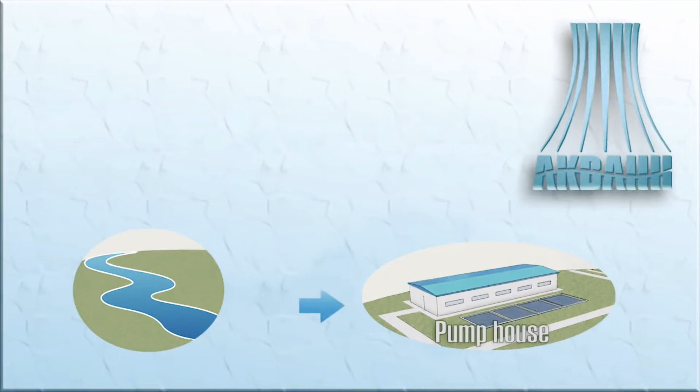In this video we describe the working principle of fan cooling towers. The cooling tower is a device for cooling large quantities of water, which circulates in a water recycling system. Circulating water system is a system in which water is used as the refrigerant for cooling the heat exchange equipment.

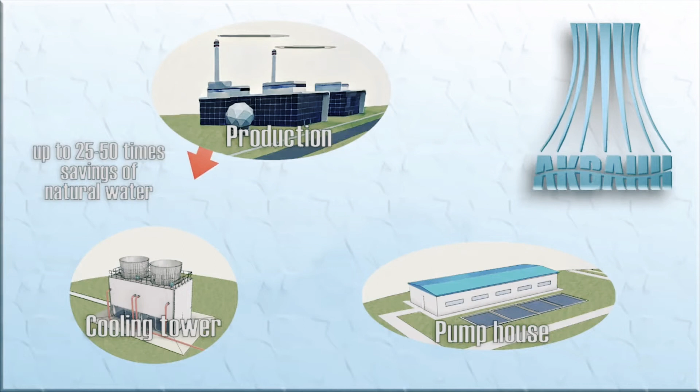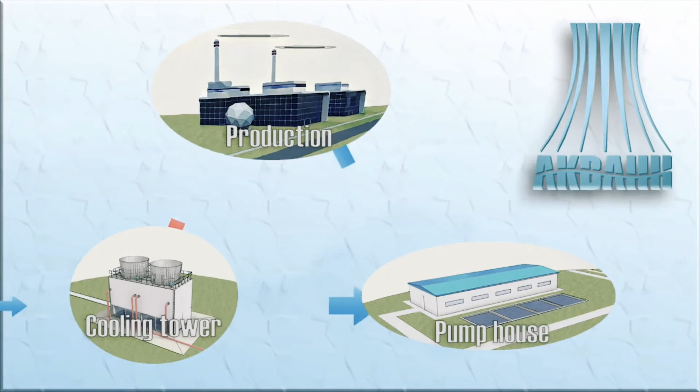The use of cooling towers saves natural water from 25 to 50 times compared with once-through cooling, and prevents thermal pollution of water bodies. After cooling, the main volume of recycled water is fed back into the process cycle. Usually no more than 5% of water is lost to evaporation, drip loss, leakage, and discharge into a blow-down system. Losses are replenished by fresh water makeup.

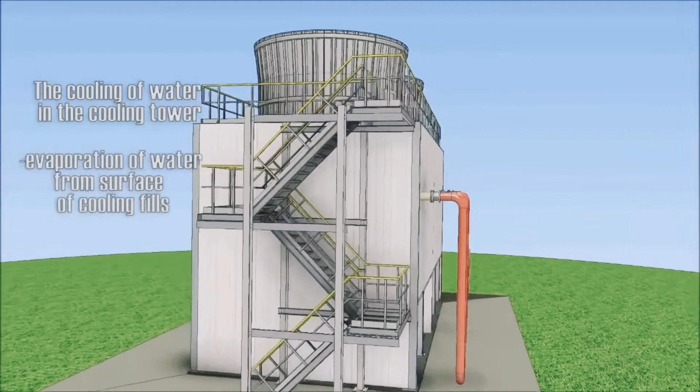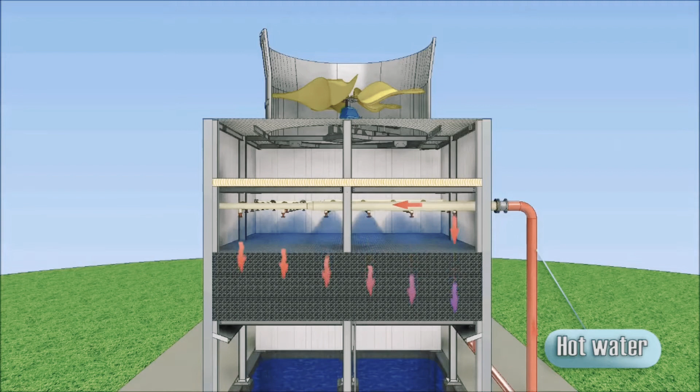So, how is the cooling tower working? Water in cooling towers is cooled by evaporation of water in the stream of atmospheric air, the heat transferred by contact with air. Hot water from various sources such as machines or heating processes flows through pipes to the distribution system of the cooling tower, which produces even water distribution to all the area of the fills by the spray nozzles.

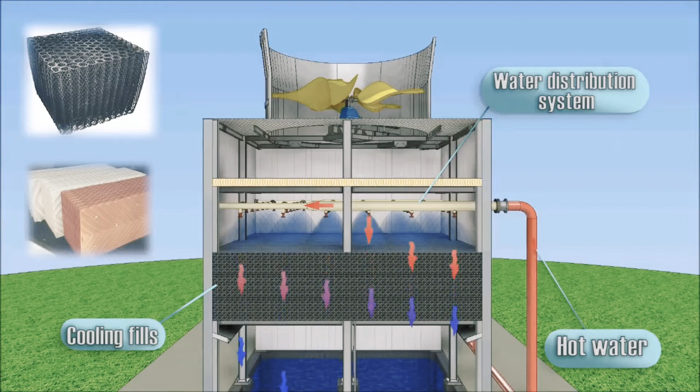On the fills, the water film is formed, from the surface of which evaporation of the water occurs and encounters airflow. The larger the surface area of the fills, the more intensive is the evaporation of water, and the more efficient is the cooling tower.

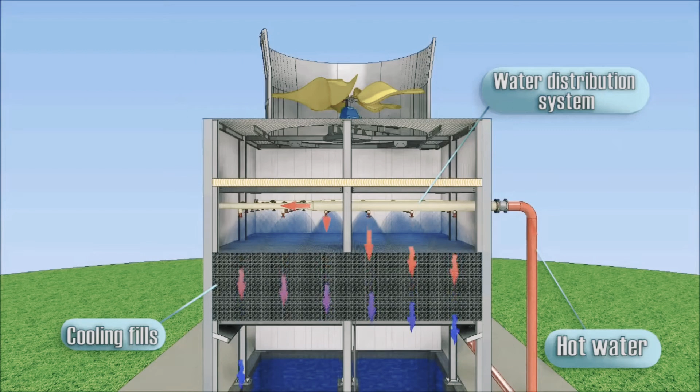Evaporation is accompanied by expenditure of energy required to convert liquid to vapor. Humidity of the air increases when water evaporates. With the help of the fan, a steady airflow with low humidity is fed.

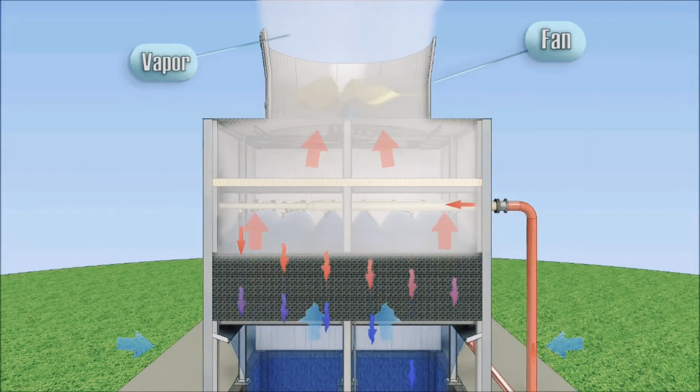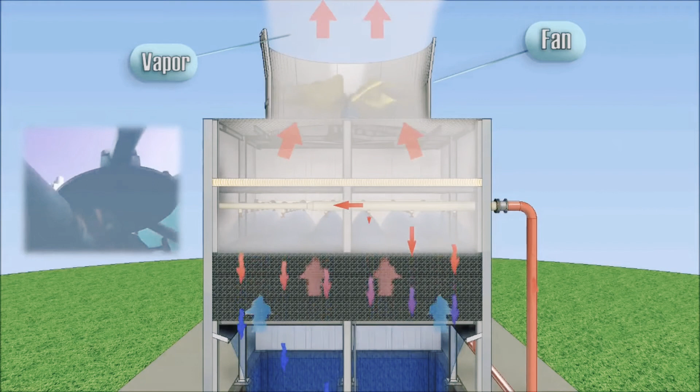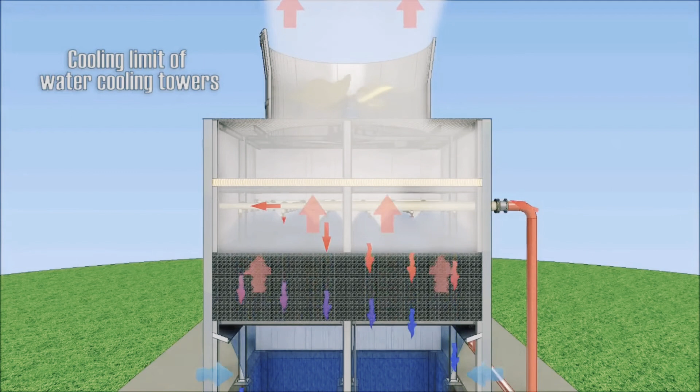The limit of the cooling water in the cooling tower is the temperature of the outside air wet bulb temperature. In practice, the limit of cooling is the temperature of the humid thermometer plus 3 degrees Celsius.

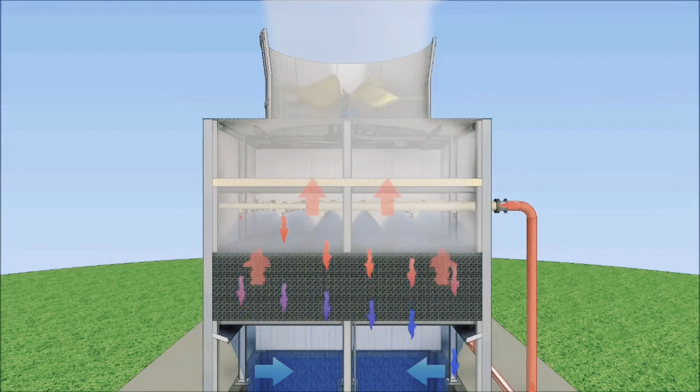Operating a cooling tower emits air saturated with water vapor and containing water droplets with a size of 100-500 microns. To prevent entrainment of water droplets, above the water distribution system a drift eliminator is installed.

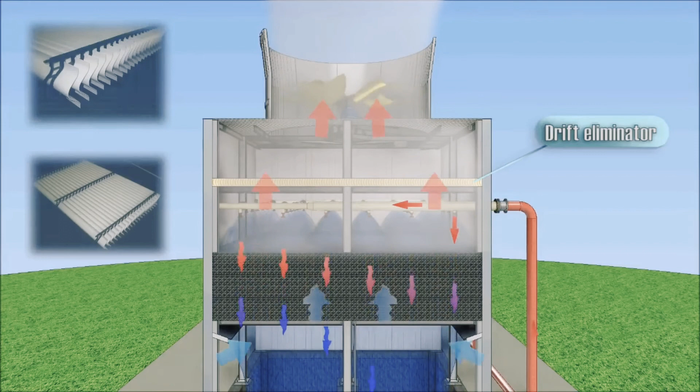Cooling water moves down and flows into a catchment tank, and then the pump supplies it to the technology process.